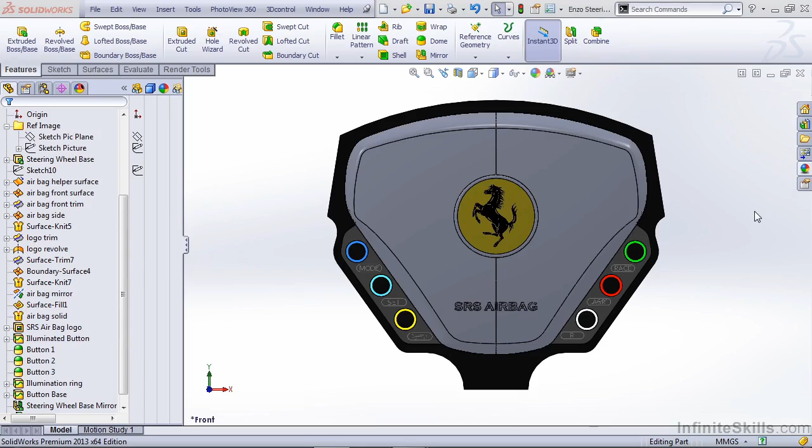Now that we've created most of the detail in the center of our steering wheel, let's take a closer look at creating the actual steering wheel portion. Let's start by turning on our sketch picture and taking a look at what we have to create.

When we talked about our plan of attack, we made note that it might be easier to create portions such as this upper section and the lower section before having to deal with all the complex geometry in the hand grip section. So let's start by creating the upper section of our steering wheel and the tachometer.

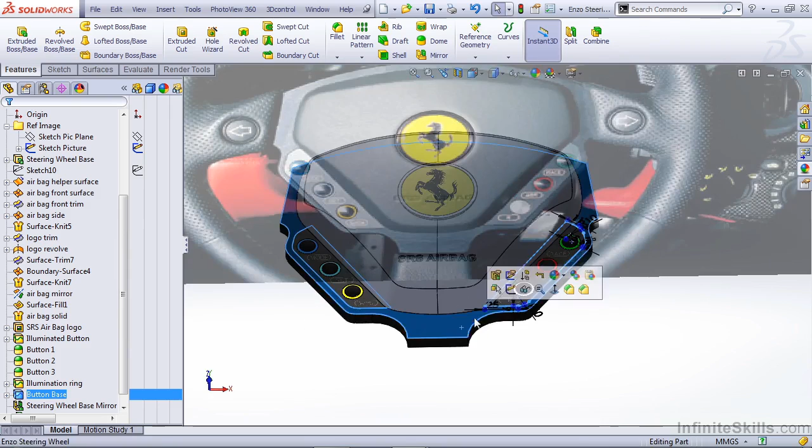I'm going to start by creating a sketch on the front face of our steering wheel. I want to create a center line path for the steering wheel. So I'm going to start by creating two construction lines. One that's going to go up from the origin to roughly the center of my steering wheel up top. One from the origin down to an area a little bit past where the carbon fiber section ends.

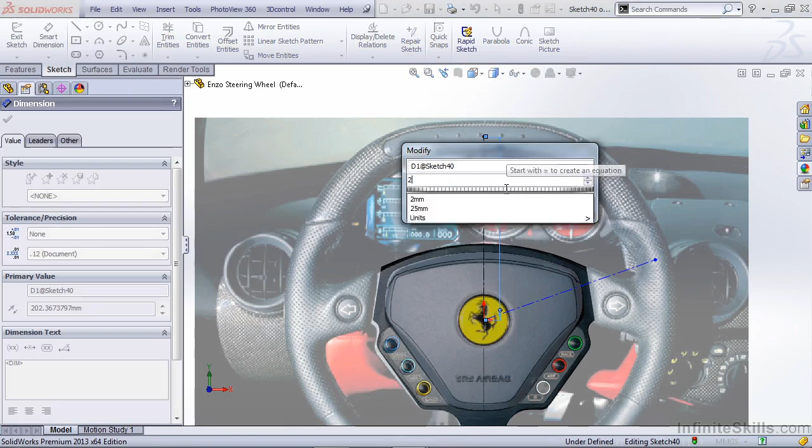And the reason I do this is because I'm going to trim the surface back to make sure I have a clean edge and I'm not trying to transition the surface into a section here. Next, let's start by adding some dimensions. In this case, let's add a 200 millimeter dimension. We'll add a 195 down here. Looks to be about right. Let's apply an angle dimension here as well. We'll do 70 degrees.

Now what we'd like to create is our center line path between the two. Because this isn't a simple arc or a simple circle, we want to create a spline that represents the geometry. I'm going to create two more construction lines, one that's horizontal at the top edge, again to make sure that we keep any kind of relation when we mirror this part to the left-hand side from creating any dips or bumps in our steering wheel. Then I'm going to create a perpendicular line by applying a relation.

Now I can create a spline using a start and an end point, apply a tangent relation, and use my handles to try to create geometry that replicates the steering wheel. Now you can notice that the section actually drops down fairly quickly up top and is not staying within the center line of our intended path. So what this means is we're probably going to have to add a secondary point by right-clicking on our spline and saying Insert Spline Point.

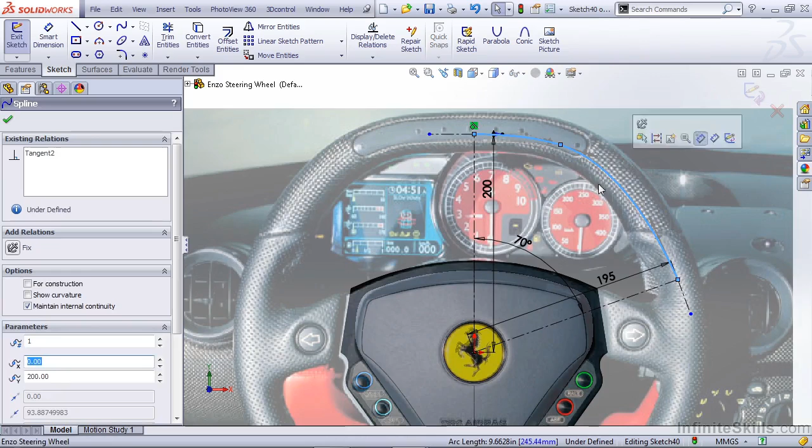We have to be extremely careful that we're not inducing any bad geometry into our spline, so we're going to drag it roughly into place, select the spline, and show curvature. I'm going to zoom out a little bit. I want to show you that where we inserted that spline point, we actually have a drastic change in curvature, but the important thing to note is that the curvature change is smooth. If we had any jagged changes, we'd be inducing a very big problem into our final surface.

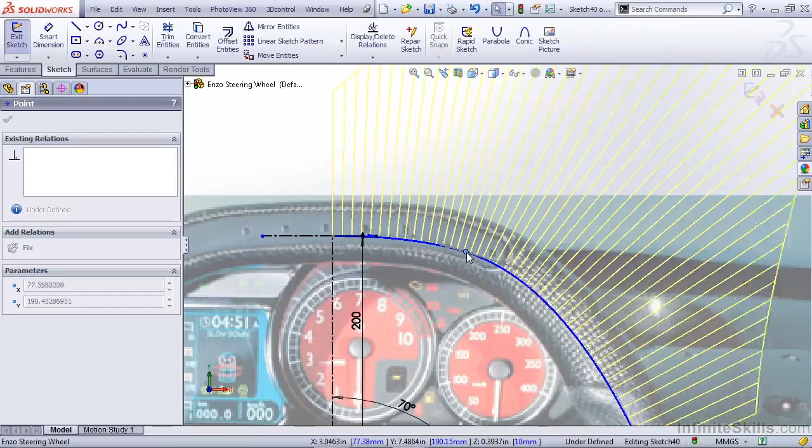We're going to need to move this just a little bit more. Notice that I'm using the spline point we inserted rather than the handle at this point. Zoom back out, take a look at our curvature, and I think we're going to move forward with this. I'm going to hit OK, and I'm leaving this line underdefined because it's possible we'll have to come back later and do some more tweaks to get the final shape right.

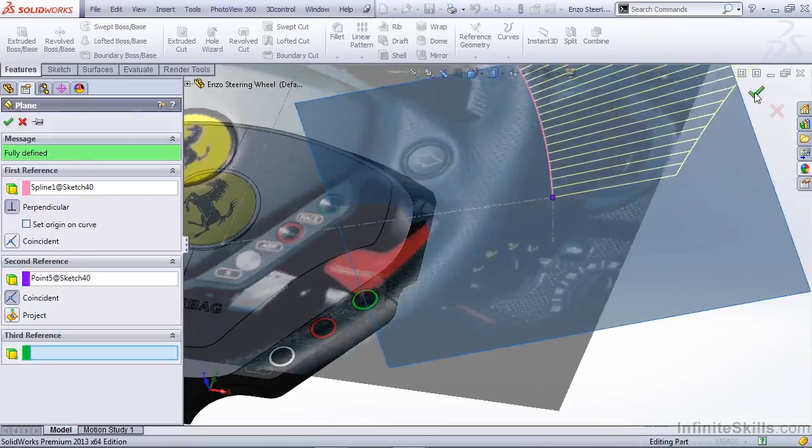The next thing I want to do is create a new plane that's based on the spline we created and its endpoint. This is going to create a plane where we can draw a circle that's going to be used as the endpoint for our loft. At the top section, we can use the right plane. So let's start a new sketch on our right plane and draw a circle. Give the circle a 35 millimeter dimension.

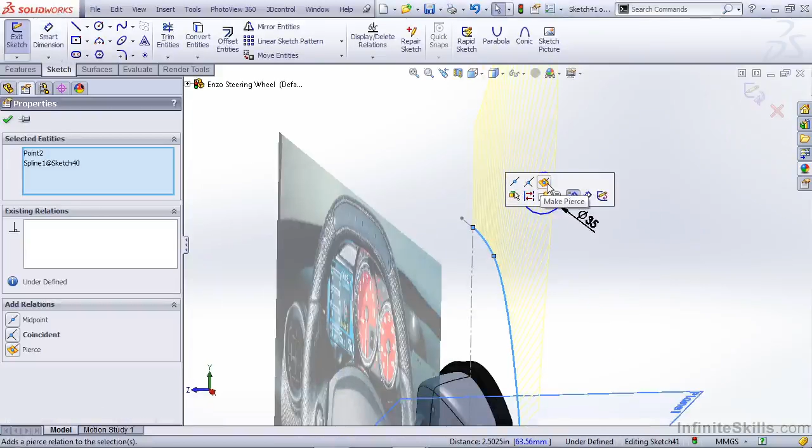Grab its center point and Control select the spline and make sure that you apply the pierce relation. This will make sure that the center point pierces the spline where they intersect on our right plane. If we look at this from the front, the 35 millimeter is pretty close to the size of our steering wheel.

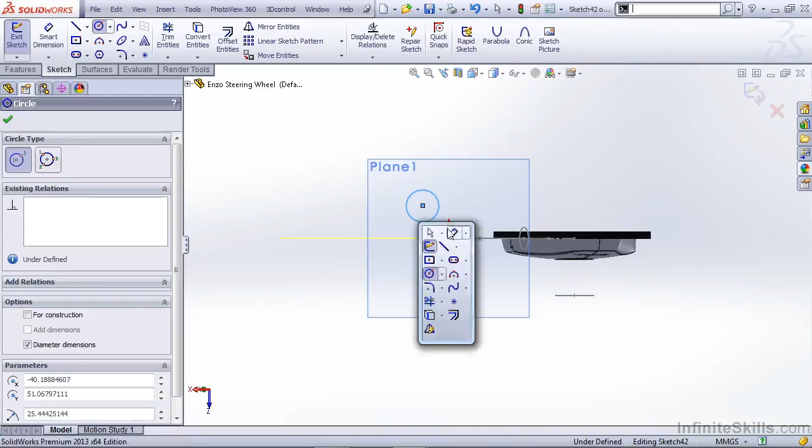Next, we want to make a sketch on the new plane that we created. And again, we're going to draw a circle. This one's actually going to be a little bit larger. Let's start with a 45 millimeter and see how that works. Next, again, we want to select the center point, Control select our spline, and make sure that those pierce. If we look at this from the front, we can see that it's fairly close to the right size.

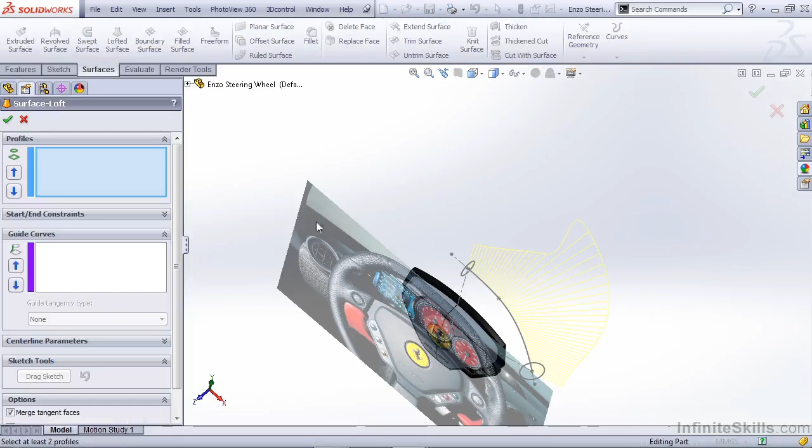We can OK that, hide our sketch plane, and create a loft between the two. So for my profiles, I want to select the 35 millimeter circle and the 45 millimeter circle. Instead of using a guide curve, I'm going to use a center line. The center line is going to be the spline we created. I want to make sure that the geometry matches our sketch as close as possible. And you can see we have fairly good transition here and everything is nice and smooth.

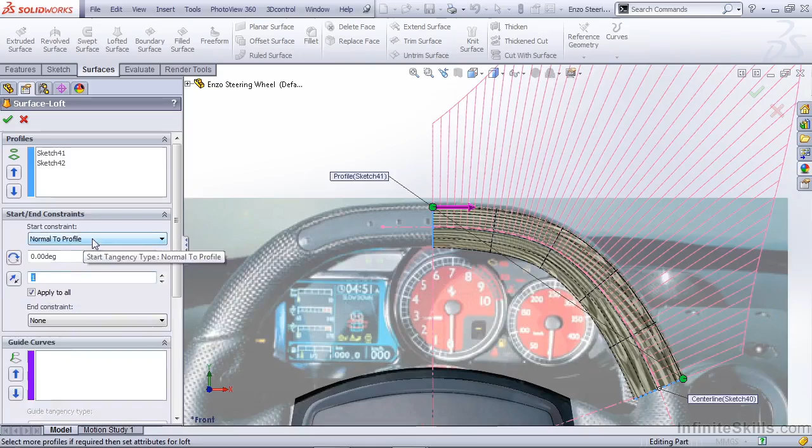I'm going to go back up to my start and end constraints. Make sure that my start constraint is normal to profile. Without this normal to profile, we could accidentally induce a dip or a bump where we're going to mirror this across the right plane. Let's hit OK and take a look at our result. So you can see that it falls a little short for the curvature on our steering wheel. Especially on the inside edge, we can really notice where the difference is.

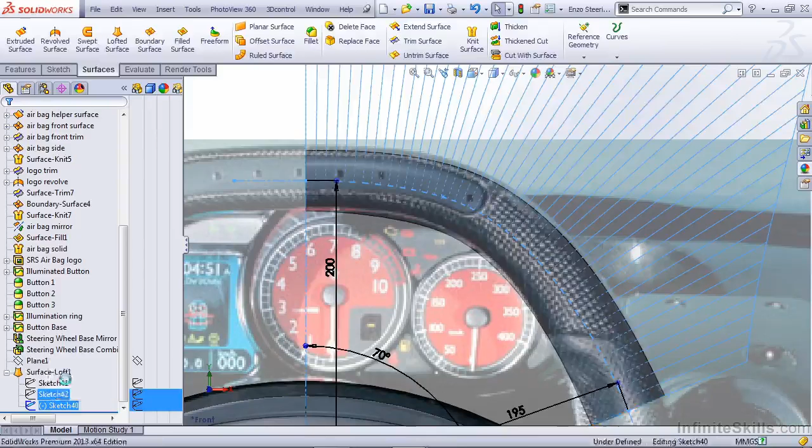So to fix this, let's expand on the loft we created and modify sketch 40. We're going to edit this sketch. We're going to try to drag this geometry up a little bit more. I'm going to activate this handle on the bottom right hand side, grab this spline point we inserted, move it around to get it a little bit closer, and actually give this a little bit larger dimension. Let's say 203 millimeters. Take a look at our curvature, make sure that we haven't induced anything that's going to create problems in our surface.

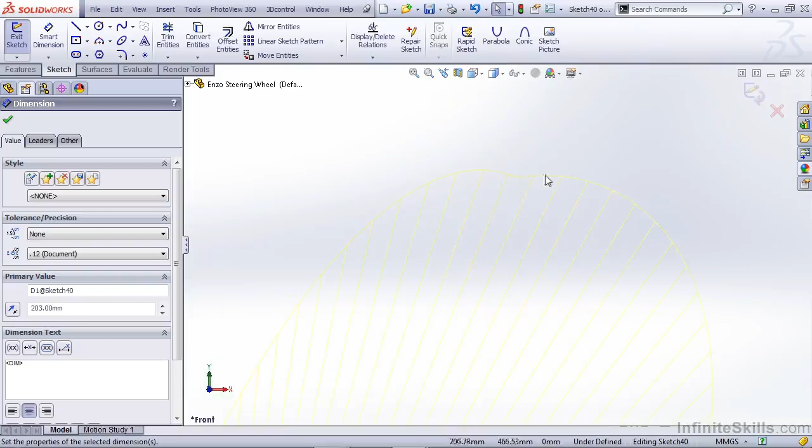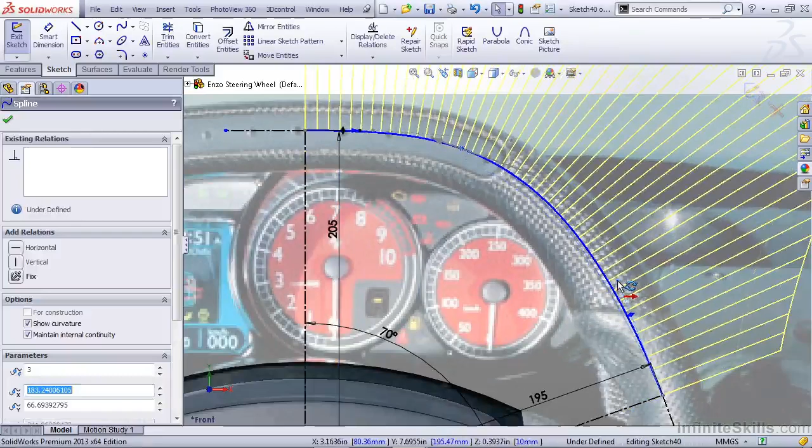Exit the sketch and take a closer look at what we've done. You can see we're still falling a little bit short here, so we're going to have to modify our geometry even farther. We're going to go to 205 millimeters, and we really need to focus on dragging this spline point out to make sure it stays in this center. Next thing we're going to do is change the angle of our lower handle. Once you get it approximately right, make sure that you haven't induced any dips into your curvature combs.

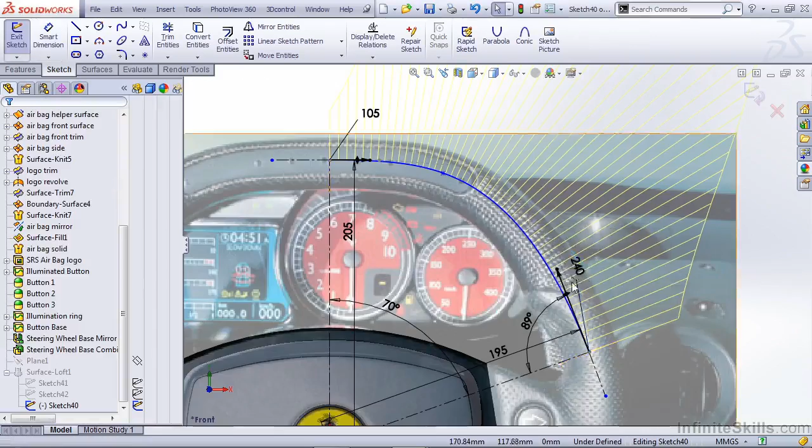You can go back and you can apply dimensions. For instance, we can grab the angle and apply an 89-degree angle here. We can apply a weight to this handle, 105 millimeters. We can apply a location to this point. We can apply a weight to this handle, and anything you need to do to make sure that this spline is fixed in your sketch. So once we exit, everything looks pretty good here. That concludes creating the base shape for our upper steering wheel.